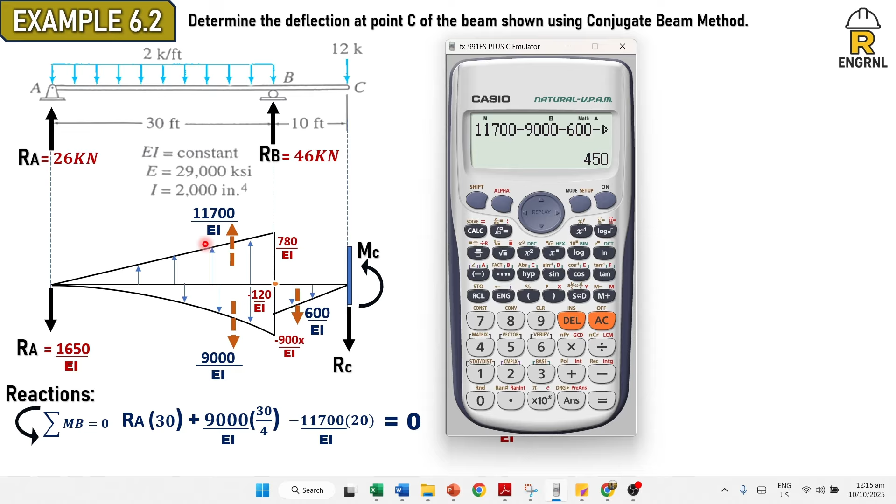It needs to be going down. So, dahil may 450 ka na dyan, no? Yan, over EI. So, we need to get the moment ng C. Paano gawin yun? So, dahil meron na tayong RC, tandaan mo, so pwede natin i-hiwalay itong segment pieces para mag-take ng moment tayo ng C.

So, para ang mag-govern lang doon, ito, at saka ito. So, dahil itong 600 at 450 ay pababa, so they will take a clockwise direction. Meaning to say, your MC should be counterclockwise. Diba? So, if I take moment at C with clockwise positive, your MC should be positive, minus 450 times 10, minus 600 times the 1/3 of 10. You'll get MC at 6500 over EI.

Yeah. So, kung titignan nyo ang mabuti, parang nakikita na natin yung sagot dito. No? Kung ang hinahanap lang natin is deflection, eto na yun. Okay? Sabi kasi ito, conjugate beam, your moment at the conjugate beam is the deflection at the real beam. So, dahil nakuha natin yung reaction dito, madali na lang yan sa dulo. So, i-cut lang natin itong portion ito, kasi dito tayo mag-take ng deflection. So, kung ano yung reaction dito, gamitin siya dito.

So, magpapalit lang tayo ng ikot. So, oppositely directed sila. So, if this is counter, this will be clockwise. But the value is the same. In short, hindi ka na kailangan mag-solve dito kasi tapos na. Nagbago yung direction niya, ang moment mo ay clockwise. So, ibig sabihin, sa conjugate sign convention, kapag clockwise ang moments, that will be a positive moment. So, technically, your M should be the deflection of the beam, and that means this side will get a positive deflection, 0.194.

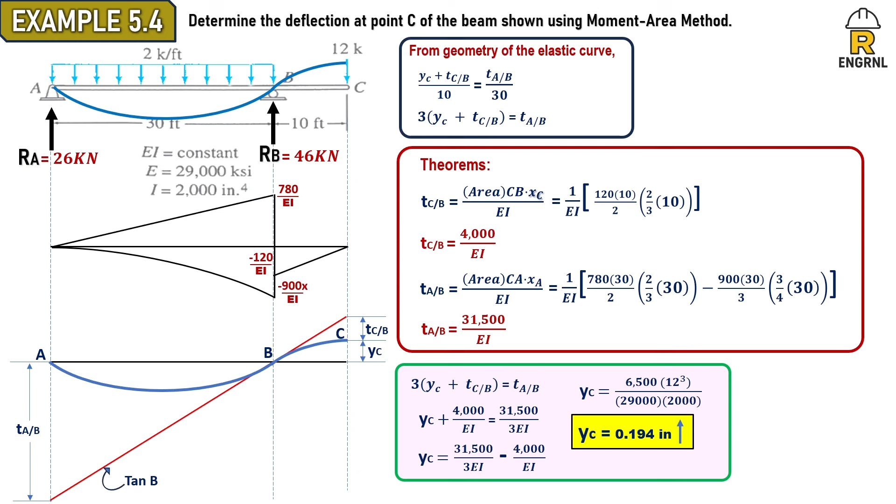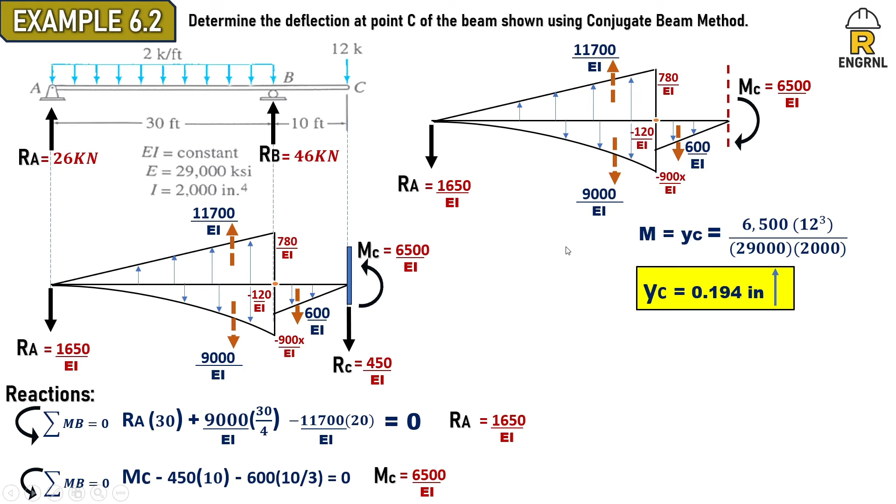Okay? And kung babalikan mo yung sinolve natin sa MAM, it has the same. Okay? So, may progreso sa bawat step, sa bawat method. So, ngayon, dahil nasa virtual work na tayo, what if i-solve natin ito ng virtual work? Mas madali kaya? Okay? So, observahan muna natin.

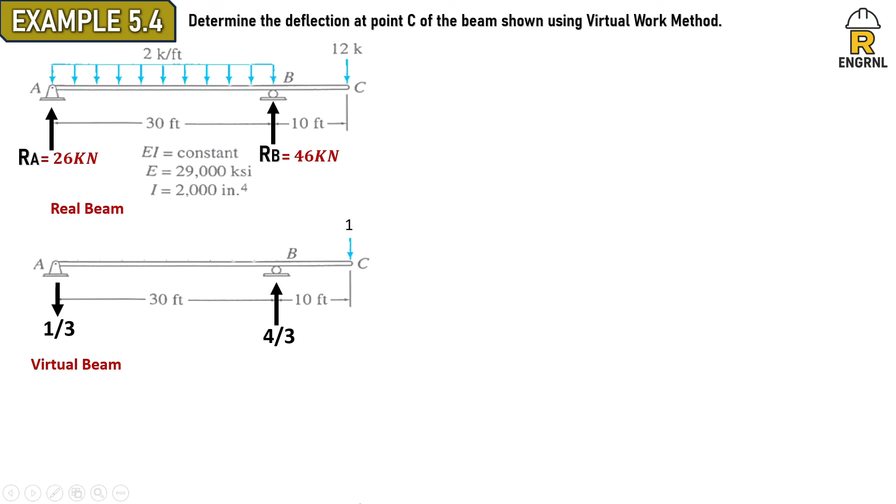So, dahil deflection sa point yung hinahanap natin, maglagay tayo ng point load. Pababa yung aking point load. Next, magka-cut na tayo ng section per segment para makagawa tayo ng moment equation. So, unahin ko yung reactions ng virtual load natin. Kung ito ay pababa yung one. So, taking moment at A, RB times 30, counterclockwise, and then the 1 times 40. So makikita mo yung ating reaction.

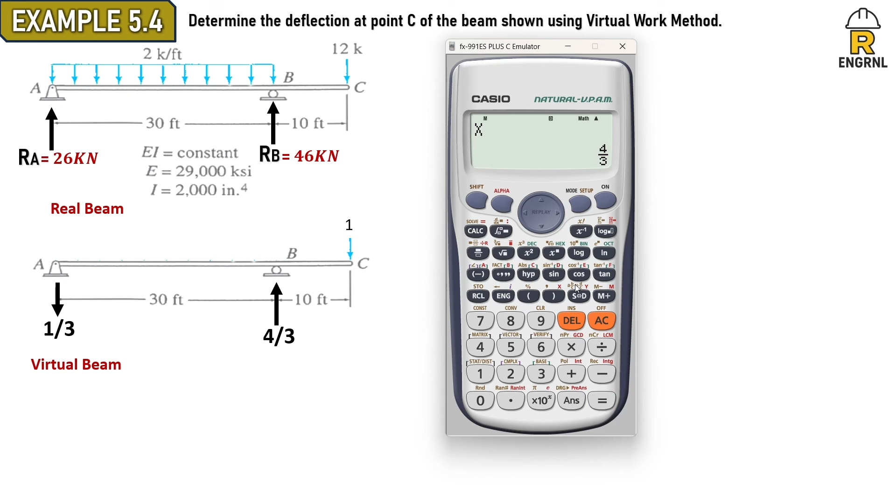Pataas. So, therefore, kung pataas yan, dapat negative 1/3. So, yun yung reactions natin sa virtual load. Ngayon, ang gagawin natin, mag-set tayo ng section. So, at segment AB, mag-simula tayo sa left, kasi mas madali dito sa part na ito. From left to right tayo, this time. And then, makakuha tayo ng moment equation.

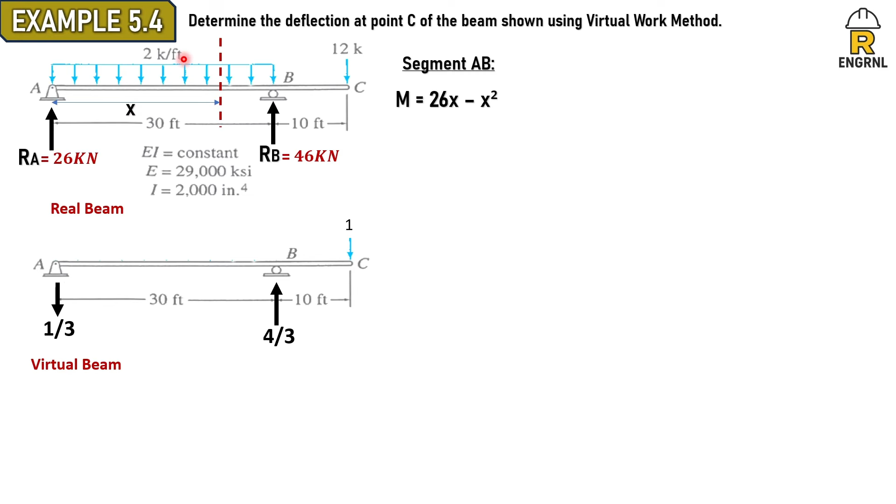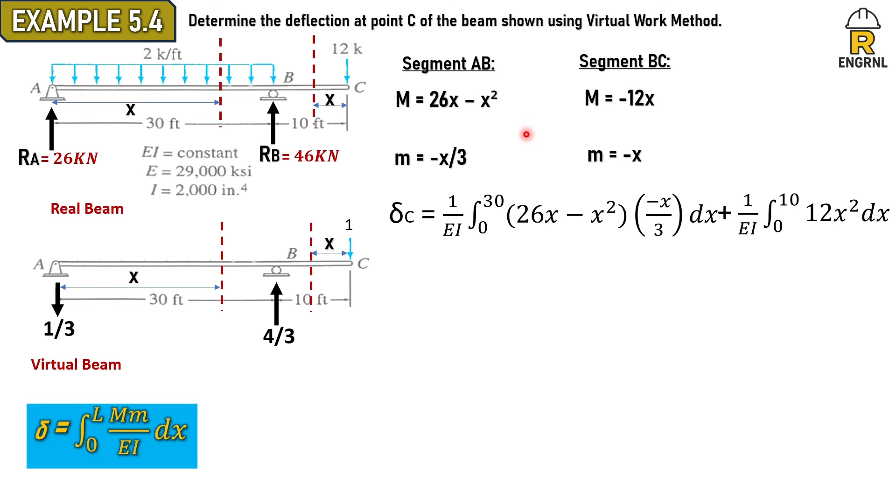Okay? So, i-sum up natin yung dalawang equations, and then simplify natin. Ngayon, tingnan natin yung limit. Sa segment AB, from left to right, this is 0 to 30. While on BC, 0 to 10. Next is to integrate all of this. Gamit ng calculator: negative 26x squared over 3, plus x cubed over 3, from 0 to 30.

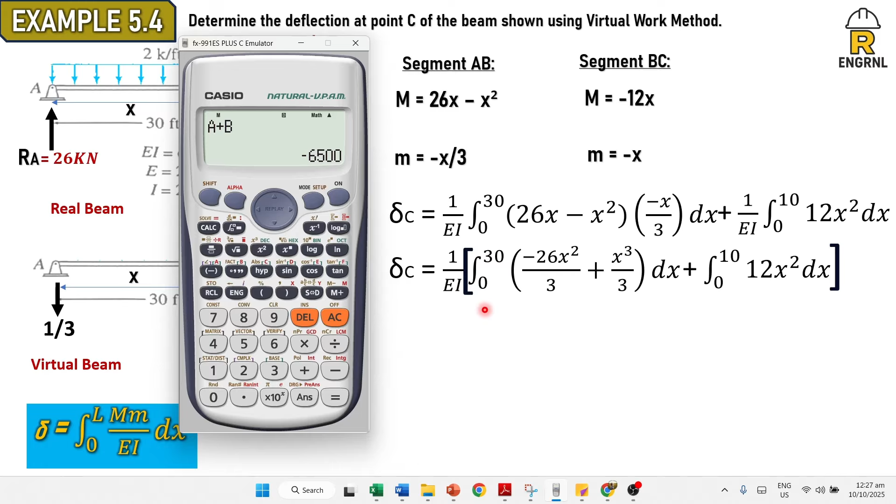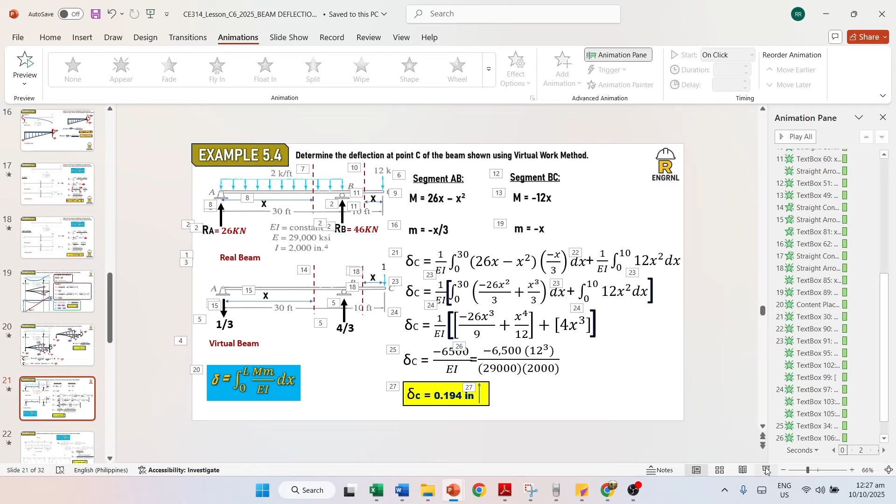So pwede natin i-store sa A. And then let's try itong 12x squared from 0 to 10. So, 4,000. Store natin sa B, and evaluate A plus B. So, negative 6,500 over EI. Technically, negative ito, no? Negative po lumabas dito, makita niyo sa ating solution sa calculator kanina.